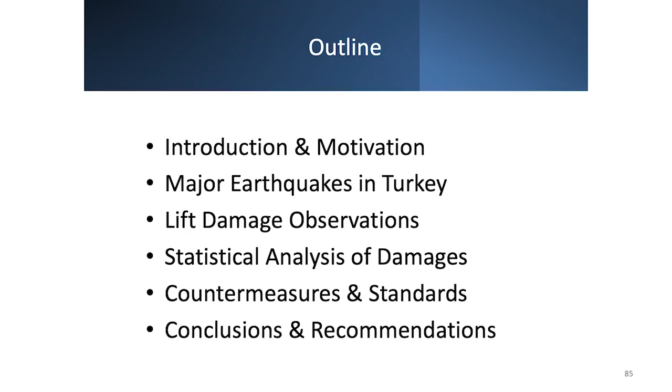Today I will present a statistical investigation of lift damage after major earthquakes in Turkey. This study combines field observation and damage data. Today, firstly, I will introduce the aim of the research. Then, I will review major earthquakes in Turkey, field observation of lift damage, and statistical analysis. Finally, I will discuss countermeasures and conclude with recommendations.

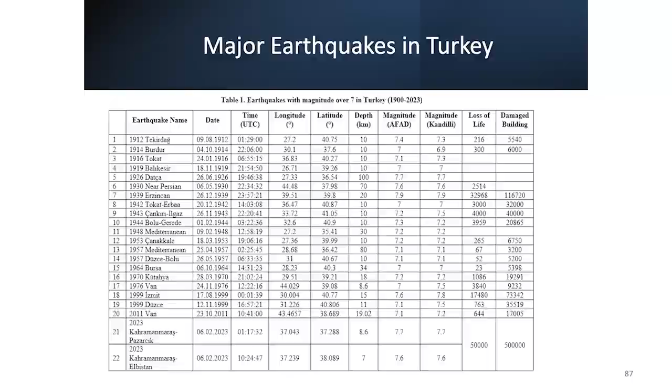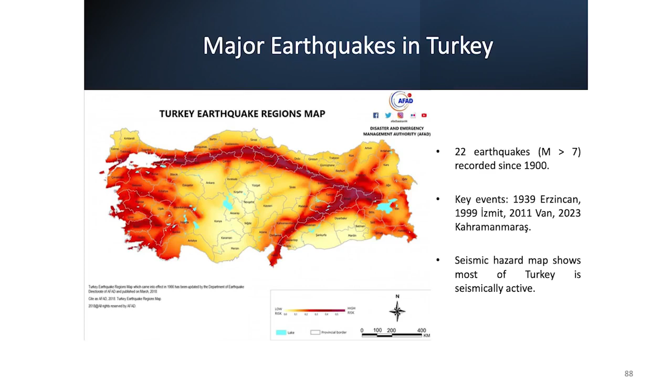Lifts, especially in critical facilities such as hospitals, are expected to remain operational after earthquakes. However, field inspections show that many lifts become inoperable due to failures in critical components. Since 1900, 22 earthquakes with a magnitude above 7 have occurred in Turkey. The most destructive were Erzincan 1939, İzmit 1999, Van 2011 and Kahramanmaraş 2023. The seismic hazard map shows that most of Turkey is located in an earthquake-prone region.

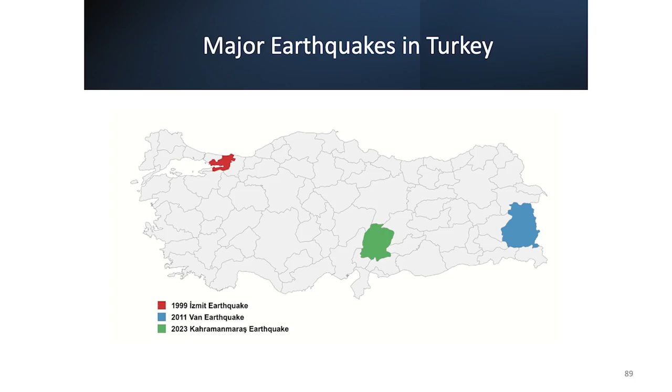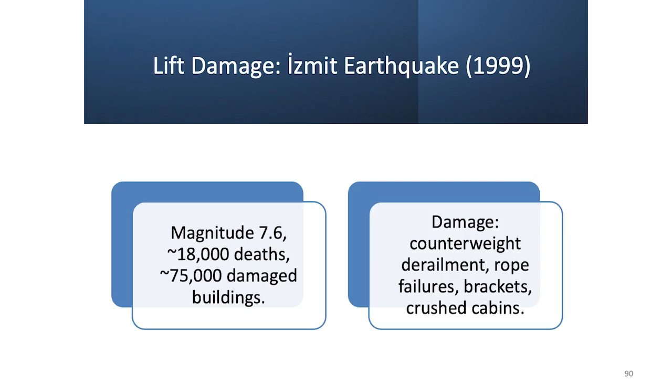The 2023 Kahramanmaraş earthquake alone resulted in nearly 50,000 fatalities and damage to 500,000 buildings. These numbers highlight the scale of destruction and vulnerability of lift systems. The 1999 İzmit earthquake with a magnitude of 7.6 resulted in approximately 18,000 fatalities and destruction of nearly 75,000 buildings. In the İzmit earthquake, counterweights derailed, hit the cables and guide rail brackets were broken. Some shafts collapsed and cables sank to the bottom.

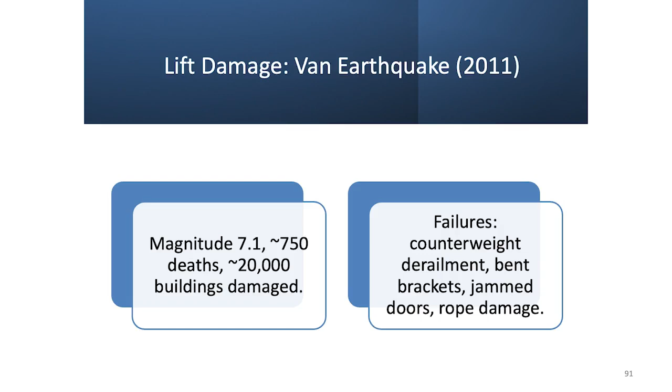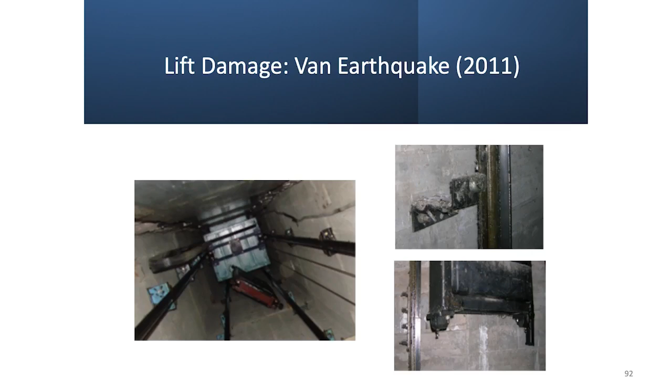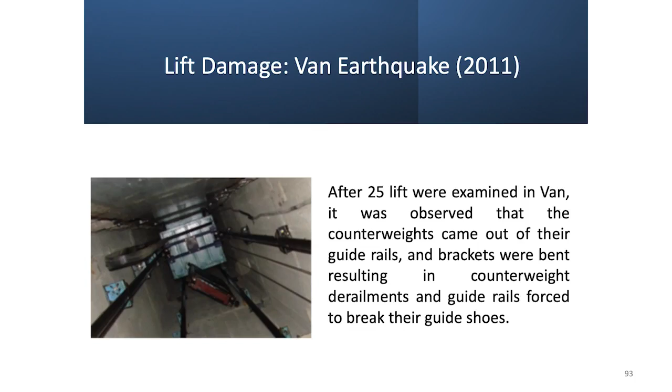The 2011 Van earthquake with a magnitude of 7.1 caused nearly 750 deaths and extensive structural damage affecting more than 20,000 buildings. During the 2011 Van earthquake, 25 lifts were examined. The most common damage were counterweight derailments and bent brackets, which forced guide rails to fail. Additional failures included broken counterweight guide shoes, jammed landing doors, and ropes slipping out of pulleys, all of which severely disrupted lift operation. In some cases, counterweight blocks even fell onto the car, creating serious safety hazards for potential passengers.

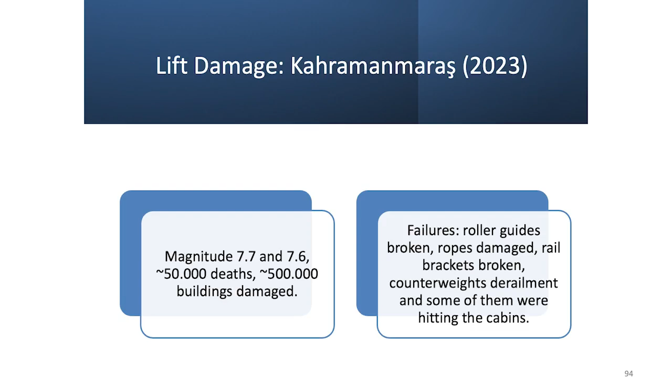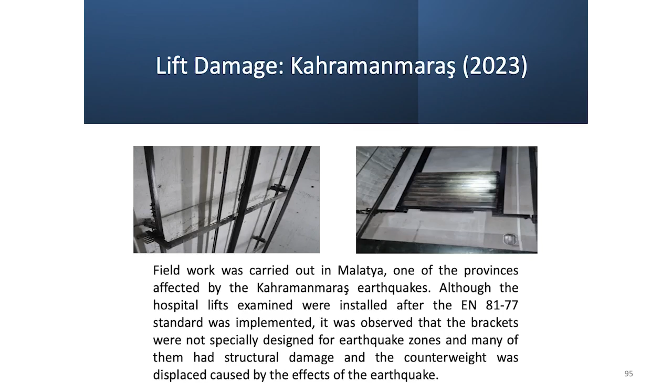The twin earthquakes in Kahramanmaraş with magnitudes of 7.7 and 7.6 resulted in approximately 50,000 deaths and damage to over 500,000 buildings. The 2023 Kahramanmaraş earthquakes caused extensive lift damage, collapsed shafts, cables dropping to the pit, broken roller guides, and displaced balancing cables. Field investigation in Malatya revealed that even hospital lifts installed after the EN 81-77 standard were not sufficiently earthquake resistant, leading to major structural failures.

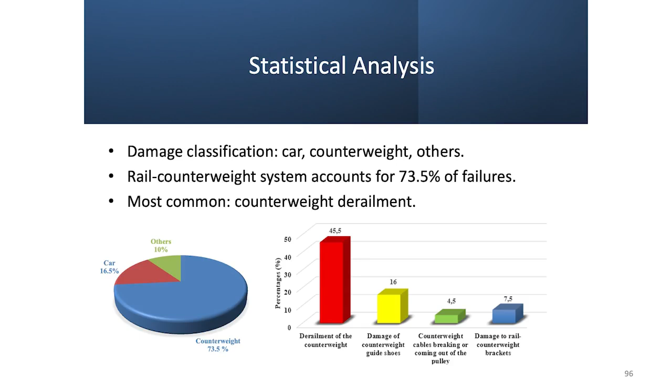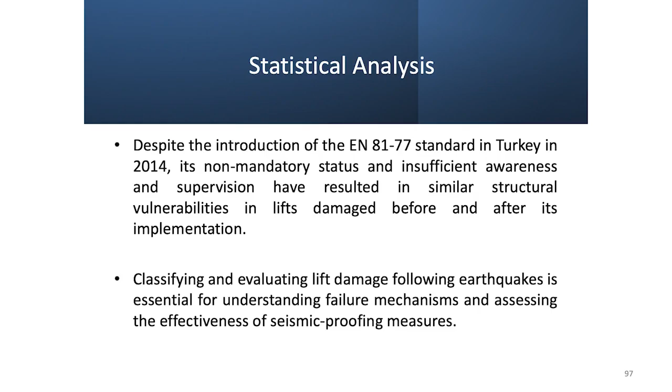Statistical results show that lift design should focus on the rail counterweight system. Rail counterweight system accounts for 73.5% of failures. Seismic design principles and regular maintenance enhance lift resilience after earthquakes. Despite the introduction of the EN 81-77 standard in 2014, the lack of mandatory enforcement and insufficient supervision meant that lifts before and after the regulation showed similar vulnerabilities.

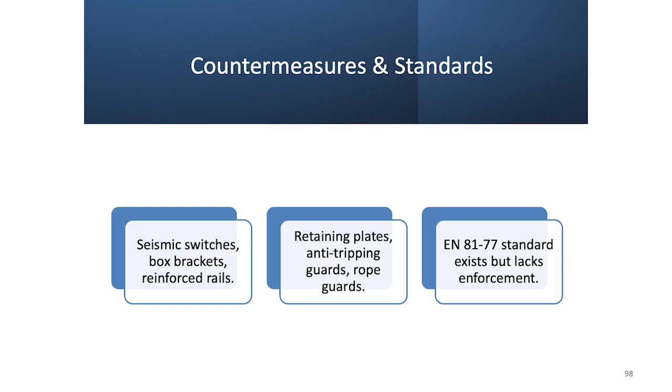Based on our findings, several countermeasures are recommended: seismic switches, reinforced box brackets for counterweight rails, properly sized guide rails, and retaining plates and roller guides. Other measures include rope guards, structural support frames for seismically isolated buildings, and anti-tripping devices for traveling cables. Together, these can significantly enhance resilience.

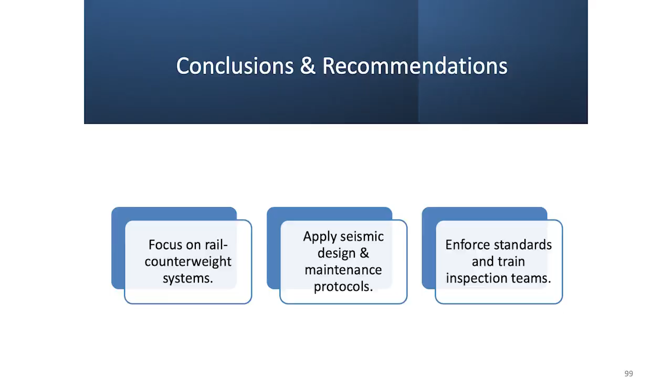In conclusion, the most critical vulnerability lies in the rail counterweight system. Future lift design for seismic regions must prioritize strengthening this system while ensuring compliance with advanced standards.